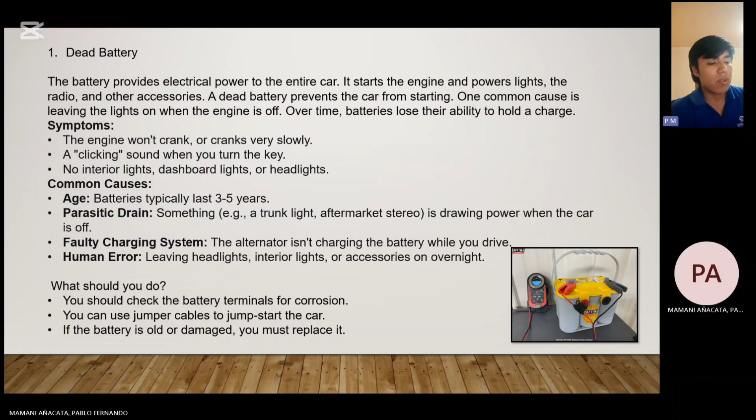Faulty alternator. The alternator charges the battery while the car runs. It also supplies power to electrical systems. If the alternator fails, the battery loses charge and components like lights or dashboard electronics may not work properly.

Symptoms: dim or flickering headlights, especially at idle. A dead battery that won't hold a charge even after a jump. Warning light on the dashboard. Strange whining noises from the engine bay. Electrical systems behaving erratically or slowing down.

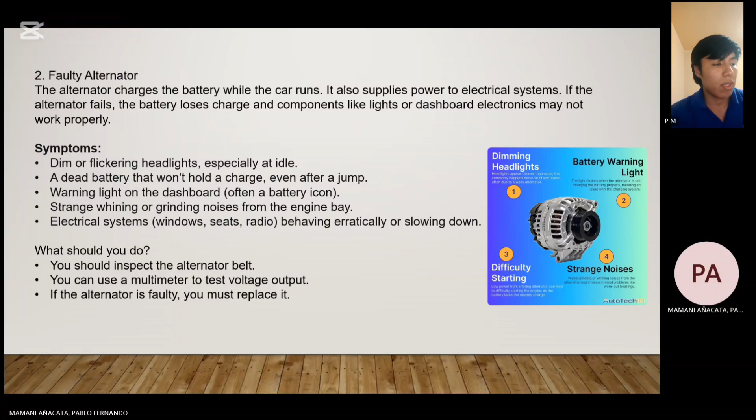What should you do? You should inspect the alternator belt. You can use a multimeter to test voltage output. If the alternator is faulty, you must replace it.

Blown fuses. Fuses protect electrical circuits by breaking the connection if there is too much current. A blown fuse stops power from reaching certain components like power windows or headlights. Symptoms: a specific electrical component stops working suddenly. Often, it's just one circuit that's affected.

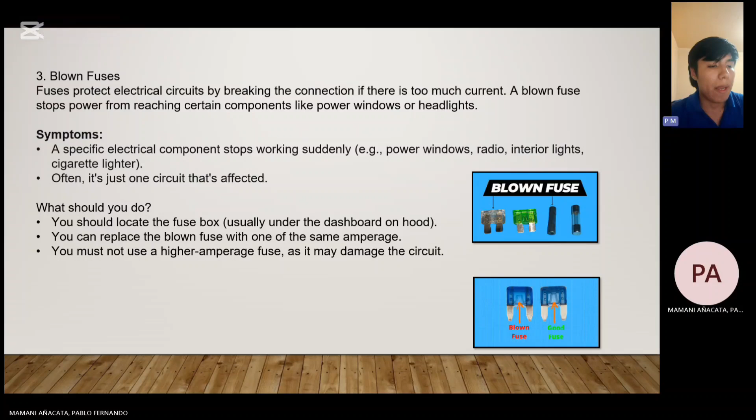What should you do? You should locate the fuse box. You can replace the blown fuse with one of the same amperage. You must not use a higher amperage fuse as it may damage the circuit.

Malfunctioning starter engine. The starter motor turns the engine to start the car. A malfunctioning starter prevents the engine from cranking. Symptoms: a single loud click when you turn the key, but the engine doesn't crank. A grinding noise during cranking. Nothing at all, no sound, no crank.

What should you do? You should check the starter engine connection. You may need to tap the starter gently. If it doesn't work, you must replace the starter engine.

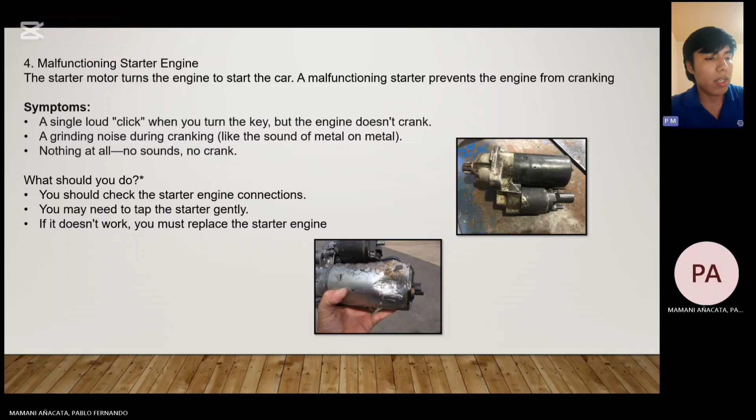Failing spark plugs or ignition coils. This is an engine performance issue caused by the electrical ignition system. Symptoms: check engine light is on, rough idling, shaking or misfires, lack of power, poor acceleration, and poor fuel economy. What should you do?

Read the code, use an OBD-II scanner. Reading the diagnostic trouble code, like P0300 or P0301, will point you in the right direction.

Visual inspection. You can remove and inspect spark plugs for wear, carbon buildup, or damage. Ignition coils can sometimes show visible cracks or burn marks.

The solution: replace spark plugs as part of routine maintenance every 30,000 to 100,000 miles depending on type. If a specific coil is faulty, it can be replaced individually too. It's often recommended to replace them in sets if they are old.

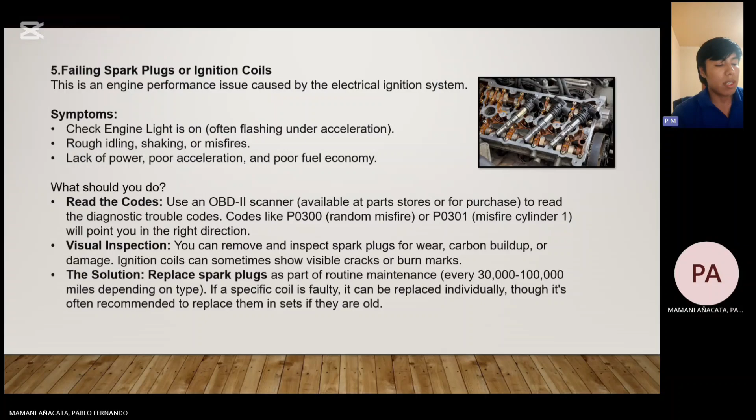Faulty wiring and ground connections. Over time, wiring can fray, corrode, or be chewed by rodents. A poor ground connection is a very common source of weird intermittent issues. Symptoms: intermittent problems, something works one minute and doesn't the next. Multiple unrelated electrical components acting strangely.

Flickering lights regardless of engine speed. Strange electrical ghosts like the radio turning on by itself. What should you do? Visual inspection. Look for obvious damaged wires, especially in areas that move or near hot engine components. Check ground straps. These are usually thick black wires bolted to the engine or chassis. Look for corrosion or looseness where they connect.

The solution: this can be complex. For simple wire damage, you can splice and repair the wire. For grounding issues, clean and tighten the ground connection. For complex or hard to find issues, this is a job for a professional auto electrician.

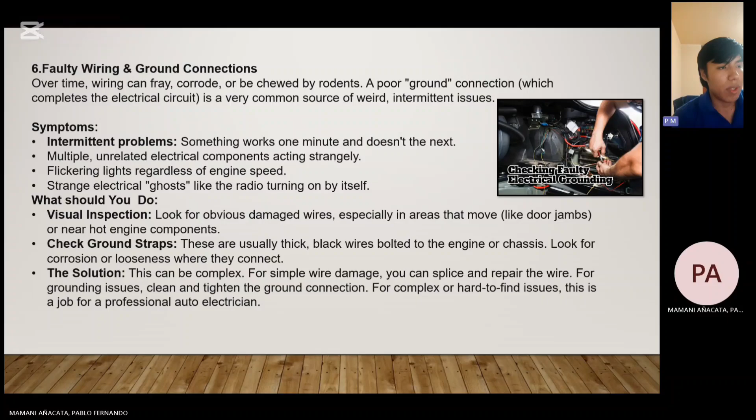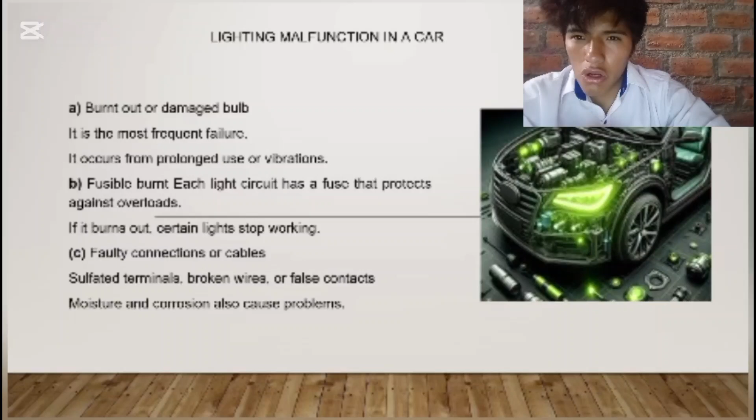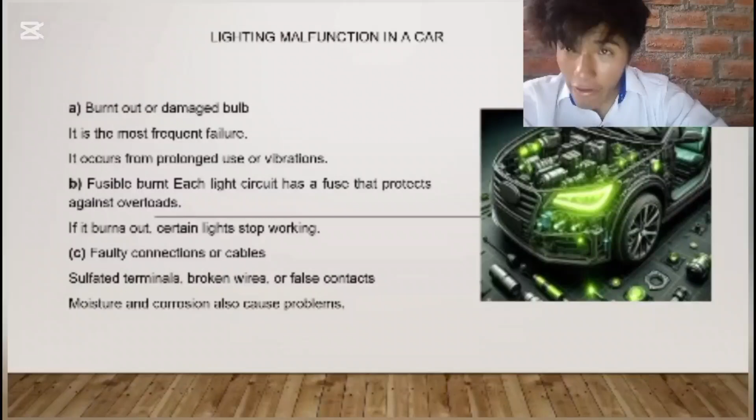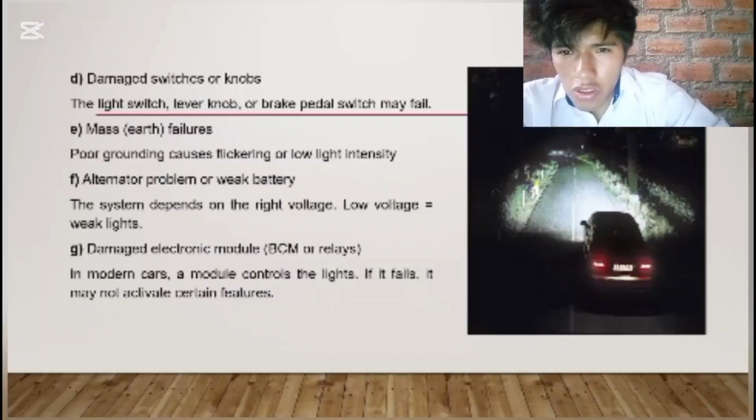The wiring of a light system is essential for the lights to function properly. A common problem is wear or damage to cables from vibration, moisture, or corrosion, resulting in lights that flicker, turn off, or operate at low intensity.

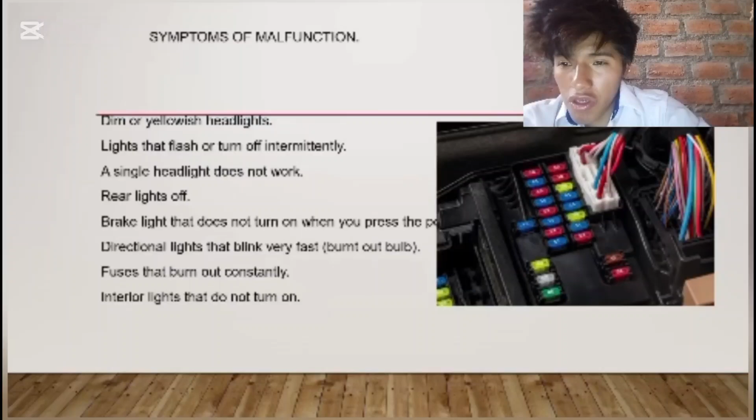The solution is to periodically check the condition of the wiring, repair or replace damaged sections, and ensure all connections are firm and free of corrosion. Keep the electrical system in condition and ensure stable lighting and safe driving.

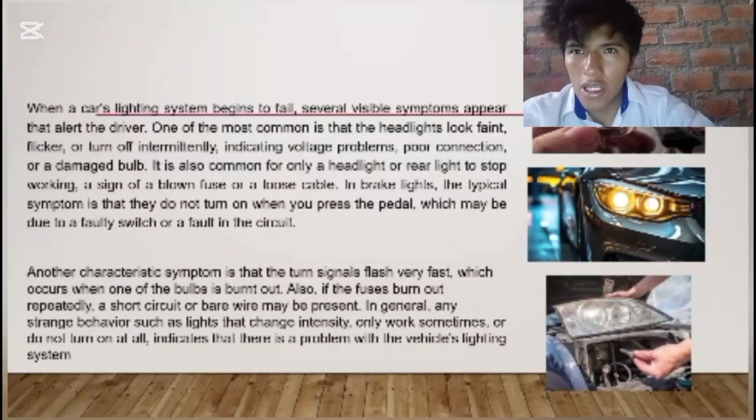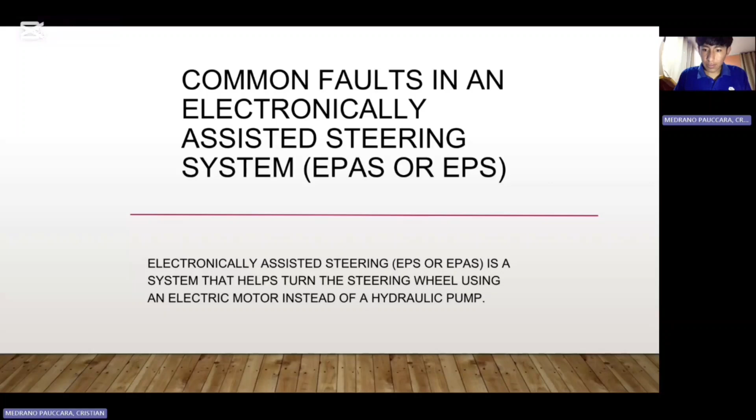Common faults in an electronically assisted steering system, EPAS or EPS. Electronically assisted steering, EPS or EPAS, is a system that helps turn the steering wheel using an electric motor instead of a hydraulic pump. Assistance motor and electronic control unit, ECU.

Causes: electric motor overheating, internal ECU faults, cold solder joints, moisture, incorrect electrical voltage, loose connectors or cables. Solutions: check power supply, battery, alternator and ground. Clean and secure connectors. Repair the motor or replace the column if it comes integrated. Repair the ECU, resoldering, driver replacement, or replace it. Reprogram the module if necessary.

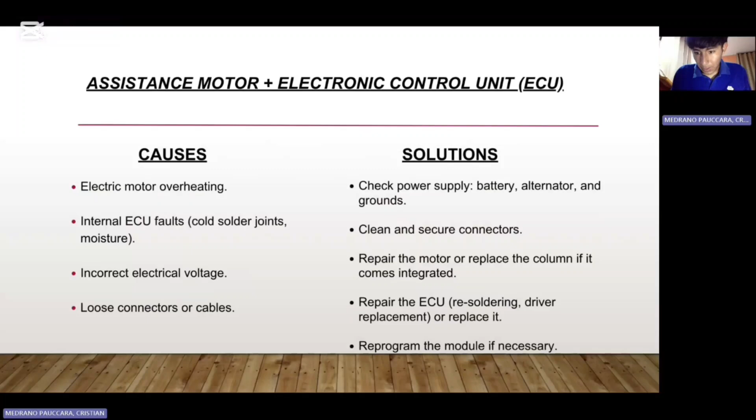Torque sensor and steering angle sensor, SAS. Causes: calibration issues after alignment or battery replacement. Damage from impacts, vibration, or wear. Short circuits, broken wires, or dirty connectors. Internal sensor failure. Solutions: scan to verify torque and SAS signals.

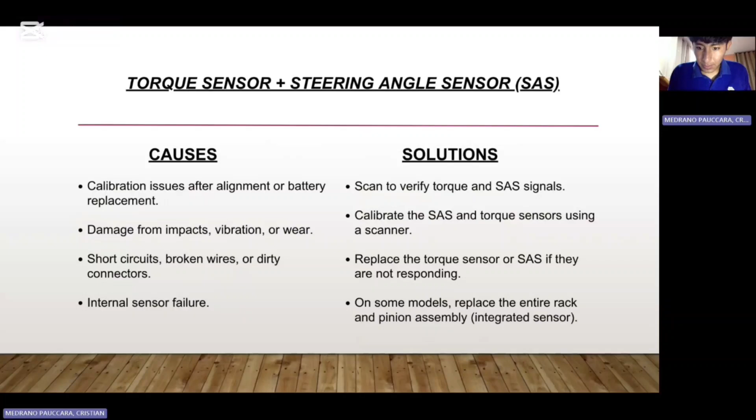Calibrate the SAS and torque sensors using a scanner. Replace the torque sensor or SAS if they are not responding. On some models, replace the rack and pinion assembly with integrated sensor.

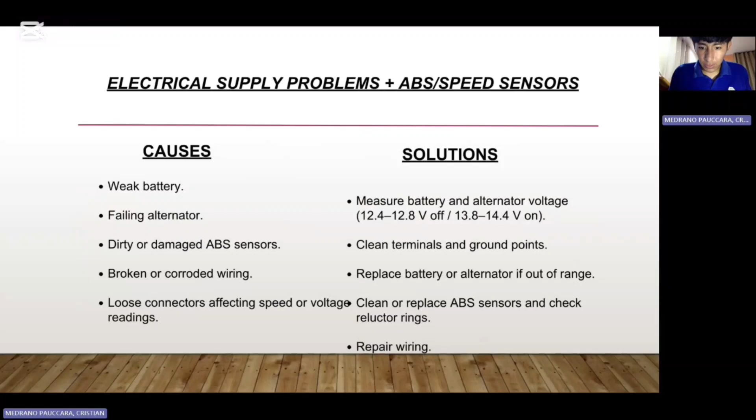Electrical supply problems and ABS speed sensors. Causes: weak battery, failing alternator, dirty or damaged ABS sensor, broken or corroded wiring, loose connector, affecting speed or voltage readings. Solutions: measure battery and alternator voltage, clean terminals and ground points, replace battery or alternator if out of range, clean or replace ABS sensor, and check reluctor rings, repair wiring.

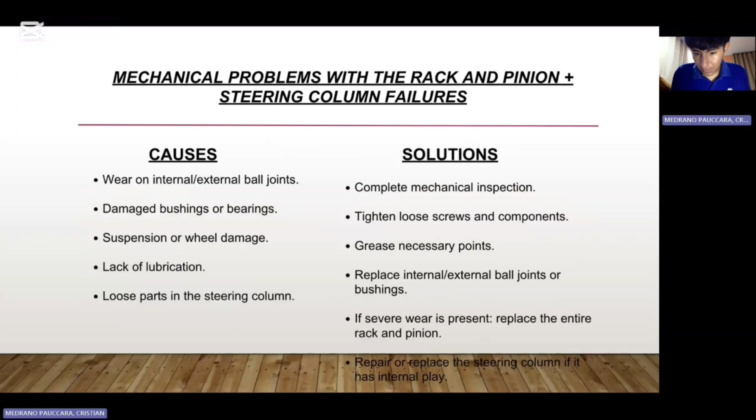Conclusion: electronic power assisted steering, EPS, improves driving comfort and safety by adding an electric motor to assist steering. It adapts to driving conditions, offering lighter steering at low speeds and firmer control at higher speeds. EPS is more efficient, precise, and environmentally friendly than the traditional hydraulic system.